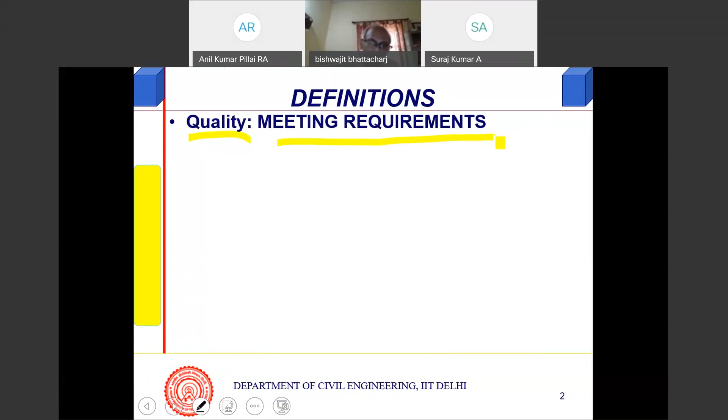So, some definitions to start with. For example, quality - what is quality? Essentially it means meeting requirements. Therefore, quality management means...

Quality management means the means, the way that is devised, for meeting this requirement.

Quality control means to know the status vis-a-vis what you have proposed. Assurance is available to the party, that is the customer. For example, cement industries, Ramco Cement, any cement industry, they do have an assurance program because cement is a factory produced material. The same thing should go to concrete action. I'm not talking of assurance today.

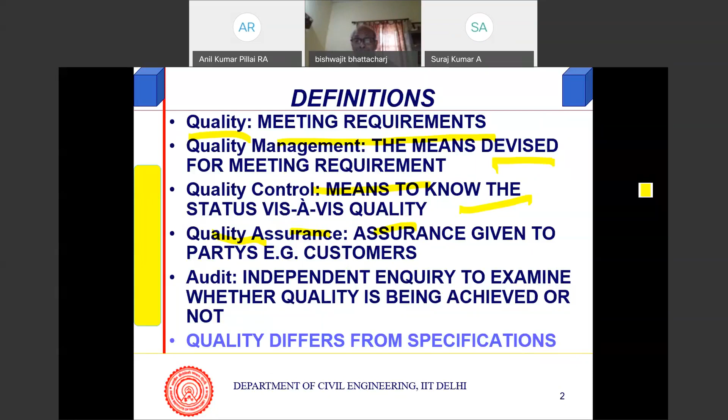So specification could mean a different material altogether. For example, M50 grade concrete and M40 grade concrete - it's not necessary that M50 grade is a better concrete, maybe in some respect like strength especially, but quality is independent of that. Now, what constitutes risk to concrete?

Essentially, it comes from lack of information, understanding of resources, and lack of interest. This may lead to problems from some sources, which I'll talk about, and when it should be addressed - for example, poor details, wrong geometry, wrong specifications.

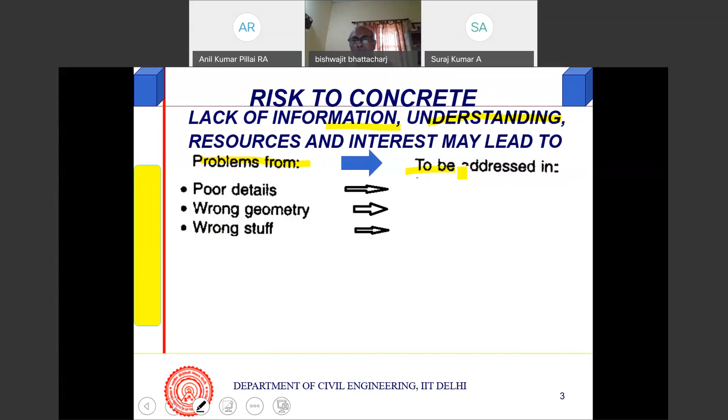These are not part of my discussion today, but this can come from method statements and material checks. So if you address this in method statements and material checks, then issues with raw material, environment, and design shape will not come in.

Now these are related to our site - for example, not vibrated properly, poor cover, wrong cover, weak surface, and joint workmanship not being proper. This is at the site, covered by checklist and also post-pour check. So what is actually important for us is this part today, but I'm not covering everything - only certain things.

One very important thing is measurement. For example, cube strength measurement or anything, any measurement for that matter, slump or whatever it is.

Well, there's an acceptance zone. We'll come to that later on when we talk of not so much of statistics, but a little of it. So we have an acceptable zone, and anything in between complies. When it is at the border, well, it does comply, but in the long run, it may not.

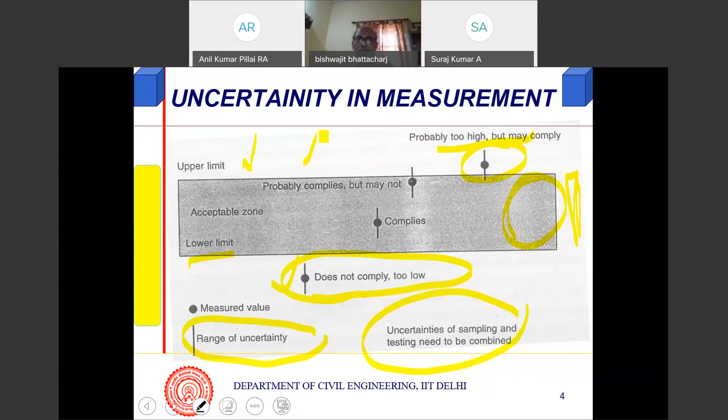So therefore, quality assurance I have defined earlier. Actually, you are assuring your client, because this is recorded under ISO 9000, and so on. There are so many things involved.

So the person comes to you, for example, Ramco does mix proportioning for some organization. So they come to the doorstep of Ramco, the reception. And from there onwards, the flow of information, flow of everything, is recorded. And the customer can verify it at any time, for traceability, what material has gone in, etc., as it comes out.

So that's quality assurance. But quality control is related to production or the production process. So I'm not sure whether Ramco has got ready-mix concrete plants. They may be having. But if you have a ready-mix concrete plant, we have got one ready-mix concrete plant there, and that's where it is more important.

I mean, assurance is also related to cement or concrete, for example. So in a ready-mix concrete plant, somebody comes, wants to buy the concrete, and from there to the end, it has reached the site at the formwork, because RMC finishes there. But if it is further beyond, then the actual structure will be the product, and if the customer is satisfied that everything has gone okay, and the customer can check and find out, that would be assurance of the project.

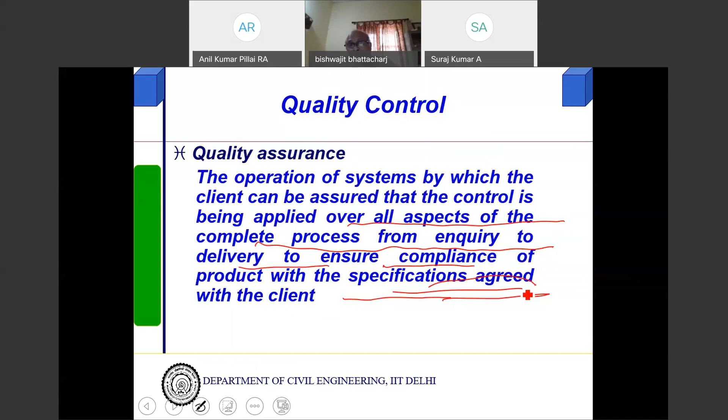The specification agreed with the client should not be better than that, but should not be lower than the lower limit. And here, the client is assured. Quality control is the operation of the procedures to maintain product quality at the selected level.

Quality at the selected level - that's my definition.

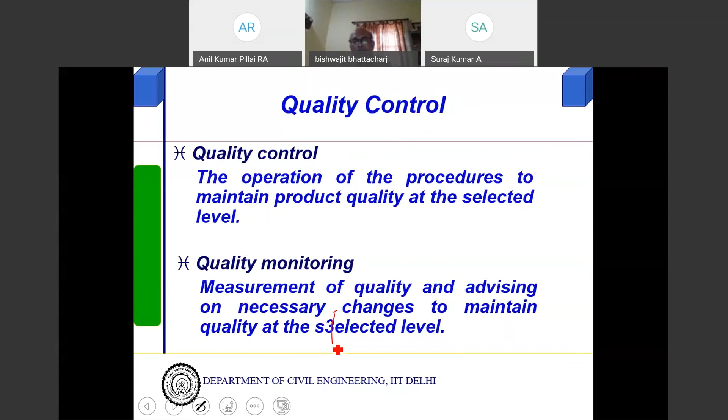Now I was talking about forward control. That involves testing all the materials. Let me concentrate on concrete. So I should be testing all the ingredients - forward control. If the ingredients are not within an acceptable range, then usually there will be further variation in the product, that is concrete, right?

Well defined, much better defined actually for, let's say, cement, which is factory produced. They have online monitoring systems, they would find out, steel or similar things. When it comes to concrete, there's a little bit of difficulty getting in, and I'm not very sure we are doing very good statistical quality control in this country.

Quality you might be giving, but the quality control system adopted is not really the most scientific or the best way, I'd say. So we'll discuss and then find it out. First thing is testing materials - this part many people are doing. Many RMC plants do this; they will not accept cement if it is not up to the mark.

Then storage is important here. How do you store the cement? Even sand in bins, open bins - if they are in Rajasthan in summer, you have dust coming in, they'll simply contaminate them.

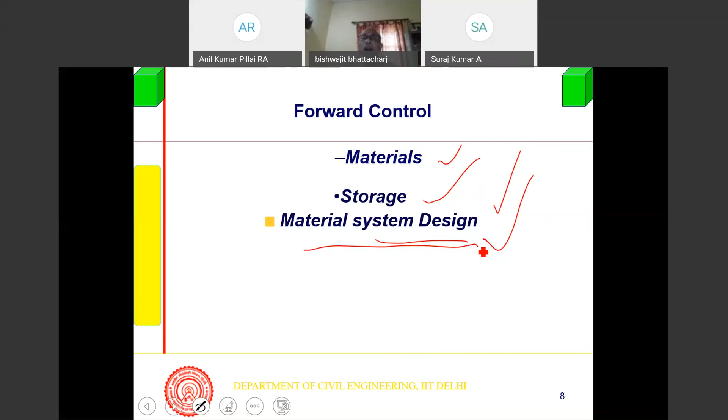Plant maintenance also forms part of forward control - we'll see that a little bit more. Your mixer machine should be mixing the job properly, that is, it doesn't introduce variables. Batching plant calibration, load cells - we'll come to that a little bit more. Part of forward controls: checking your machines, checking your material system, storing them, checking the material design, doing it properly. Maintenance of production machinery - these are very important, this is part of forward control.

So if I have a ready-mix concrete plant, at the gate for entry of materials there should be a testing procedure available where it will test the material and allow it to come in. And when it is in, it should be stored appropriately. And all the batching plant's load cells or weight measuring devices, or dispensers for discharge of water and things like that, should be calibrated from time to time - calibration check.

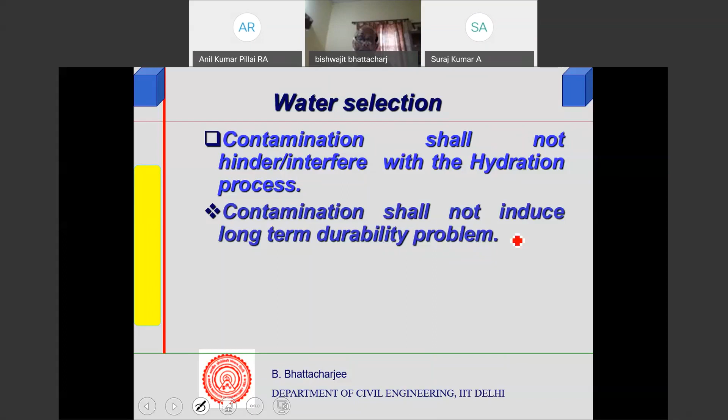That's why we find in northern India, even in Bengal, people have used chloride-ridden water, leading to corrosion within 5 to 7, 10 years of time. In Delhi it's very rampant, affecting setting time.

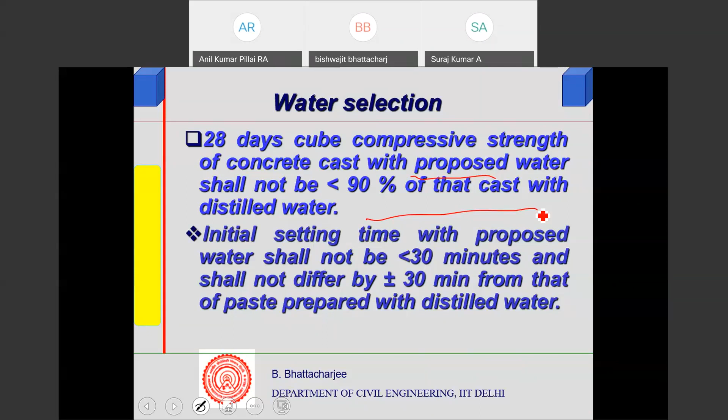Then coming to batching, this is important. This doesn't exist, but varieties of sophisticated measuring are also important, and weight is very important. Gauges. Waters are usually flow meters, but in some cases they might be weight.

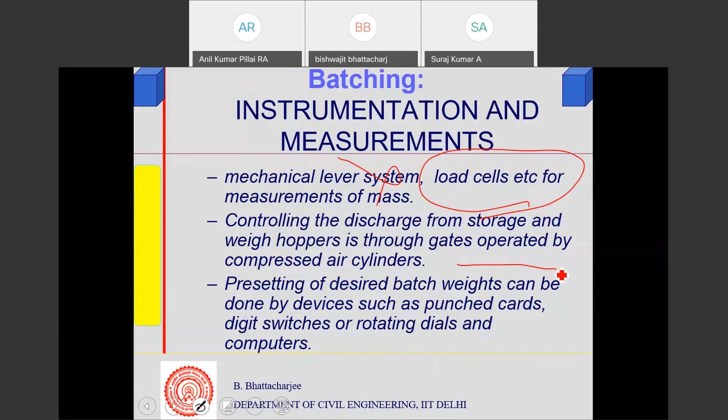This requires calibration. It should be regularly checked with a routine, and some specialist checks for weight. You know, if for example water is W, and you propose cement as C, then W by C gives the ratio. But if you have made an error, it will be W plus or minus delta W divided by C plus or minus delta C, which means the strength will vary more.

In the extreme case you have very high water if it is W plus delta W divided by C minus delta C, beyond tolerances. There are certain tolerances the codes allow you, but only if calibrated properly. So batching plant calibration is

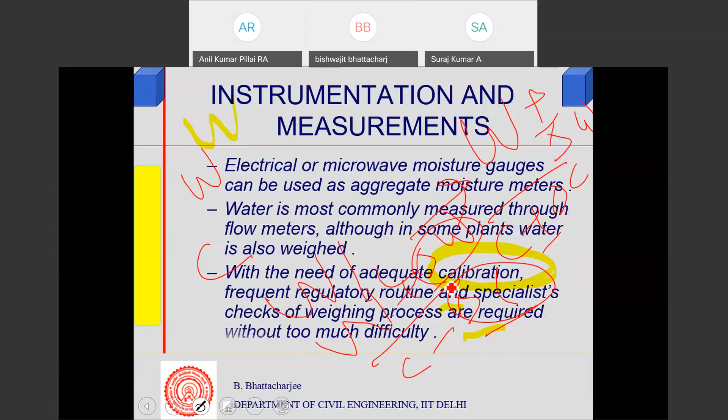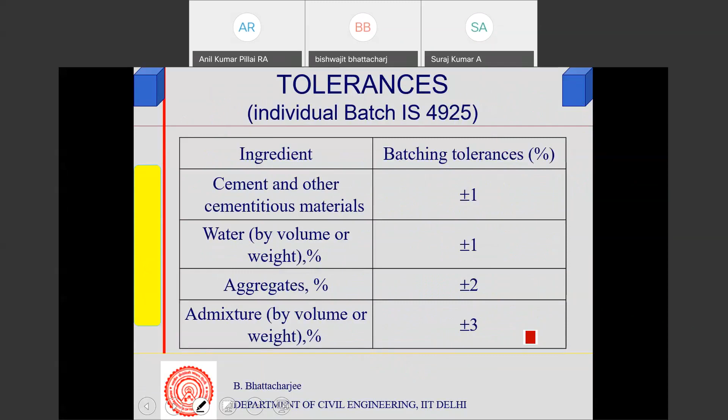very, very important. Batching requires time to time calibration in your mix proportion. The IS code gives you batching guidelines, I won't go into the detail, but you can look into it. Cement and other cementitious materials, by volume or weight, these tolerances are given, so it should be within that tolerance, even with variation. Tolerances apply to a minimum of 30% of the scale capacity divided by weight tolerance, as given in the table.

So it's a guideline. Now, the next important point is mixing. If your concrete is uniform it will still have some variation. Variation depends on proportions, as I said. So if your coarse aggregate, let's say coarse aggregate is C,

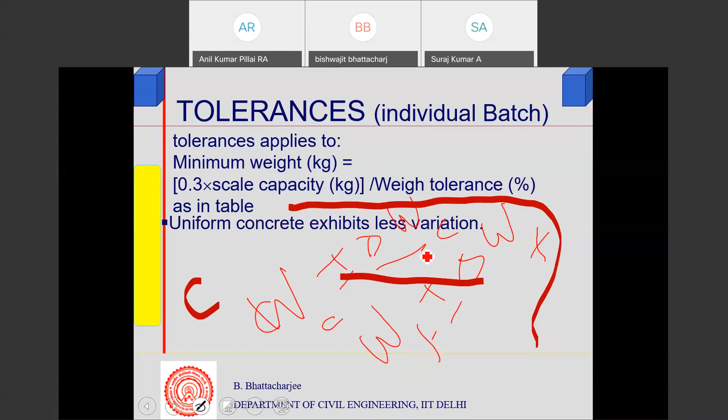You might add more or less, you just don't know. So the mix proportion that you actually designed will have a lot of variation because of the production process. Therefore, quality control should look into these issues, check calibrations regularly, and make it uniform. You need to exhibit less variation, though there will be variation nevertheless.

That's what I'm highlighting all the time. Higher delta C, higher delta W, errors in cement and water measurement will result in higher variation in strength, and in all properties in fact. Quality control in mixing, this I also want to highlight, can introduce non-uniformity.

Suppose you collect fresh concrete samples at different stages and check the properties immediately. Your mixer machine, of course the bottom opening mixer machine used in RMC batching plants. But if it is a rotating drum type mixer, this sort of rotating drum is not used anymore in RMC plants, you won't have that.

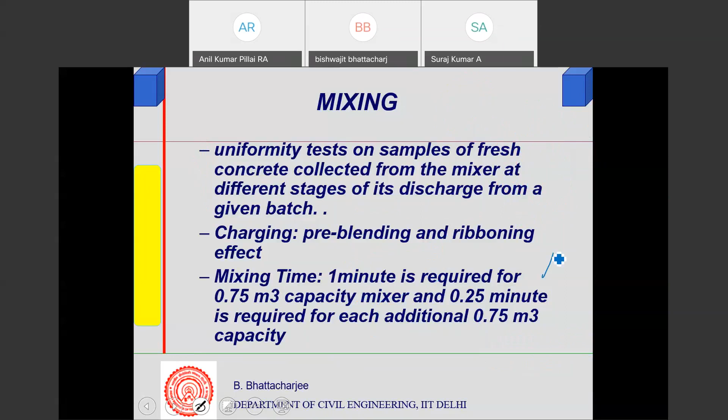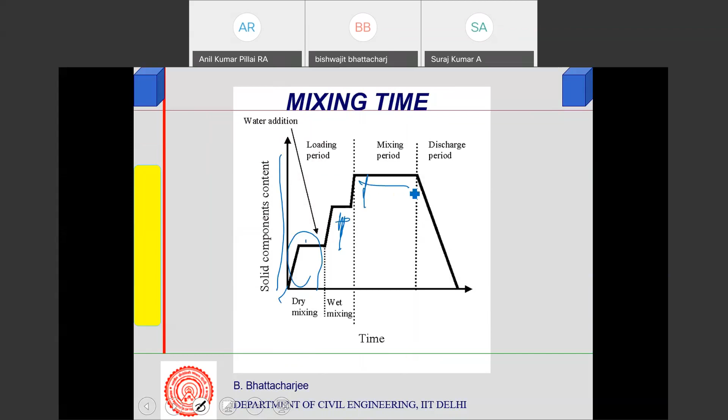Now, certain guidelines give you: 1 minute is required, and 0.25 minute for each additional 0.75 meter cube capacity. Okay, those are guidelines. But my point is, this is the better way: dry mixing first for the solid components content in the mixer, then water is added, followed by wet mixing and final water added, then a mixing period, then a discharge period. That's a good kind of practice.

There must be many revisions beyond this. Batch material, except for the full amount of water, etc. It just specifies that minimum. Okay, that's fine. Mixing time beyond a point may not result in more uniform distribution. Increasing it can improve uniform distribution of hydration and therefore strength, but if you prolong it too much, it cannot increase the strength proportionally.

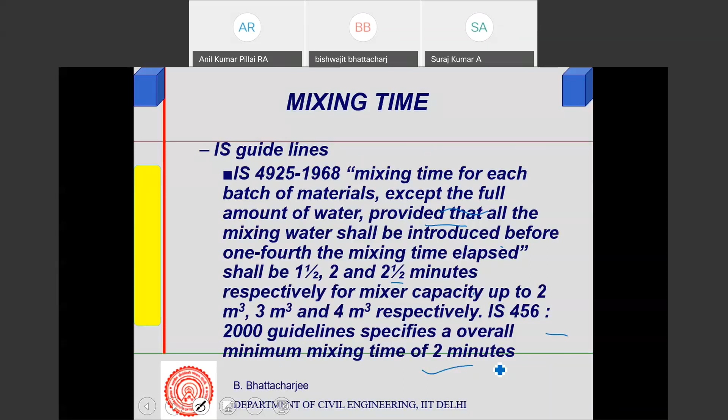It has no benefit. So it's a soft aggregate, there could be any issue that might increase. So this is what people have seen.

So the machine looks at workability of fresh concrete. Density of concrete check - how do we do that? We'll just talk about it. Air content, coarse aggregate content, ratio, and cement content.

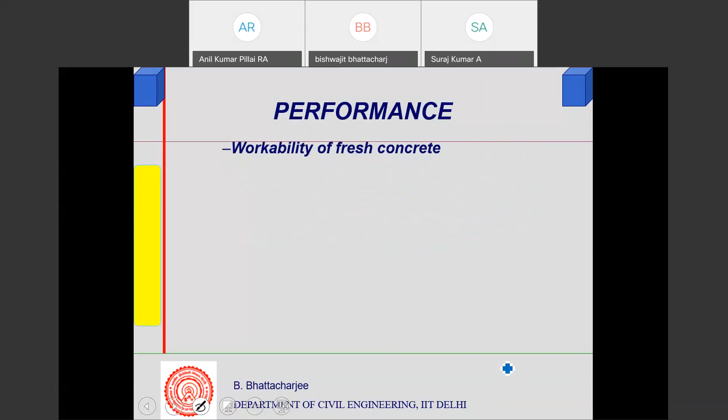Now, 15% of the discharge, first 15%. Machine is discharging samples, measure their workability immediately. Of course, wet measure, air content - compressive strength will require time.

Because analysis of fresh concrete, what is done is it is sieved through a 4.75 mm sieve, whatever is retained, that's the coarse aggregate content. Wet sieving to 2.36, whatever is the solid particle will be cement or powder. So there are ways.

So from first 15% of step find this, and last that is after 85% of discharge, you again find out this. So 85% is discharged, and if the variation is not too large - really what happens is, initially there's a tendency to actually discharge or segregate.

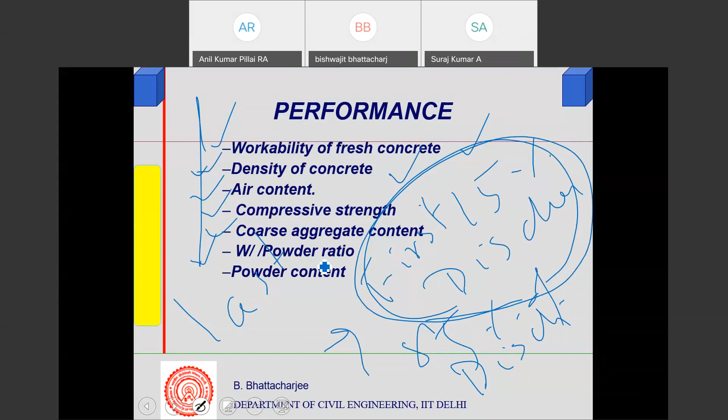What we find is, if you increase the mixing time, strength increases, and variance, which is actually standard deviation related to variation.

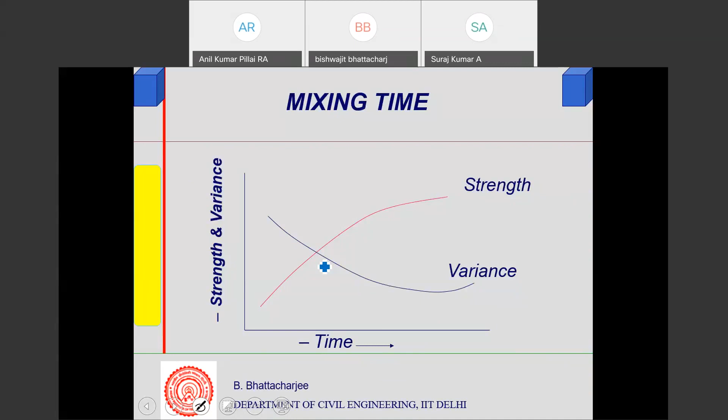So optimal mixing time concepts and doing practical work at a batching plant - that would be very good work actually.

Control - you test material mixing, involve batching, mixing machine, check their performance from time to time. And that's possible, not submission, just replicate.

Ready mixed concrete plant - site mixed concrete cannot be as good quality-wise. Quality control cannot be as good. In fact, many of the developed countries use about 70% of their cement for RMC route. In India, I'm not very sure, it was about 5-6%, more than that.

But it may not have picked up - the action has also picked up to 7%, let's say, mechanized. But otherwise it is still quite a bit non-mechanized, and there these problems can come very regularly, where nobody bothers.

Of aggregate - their immediate control during the production process. This was all forward control, all before production.

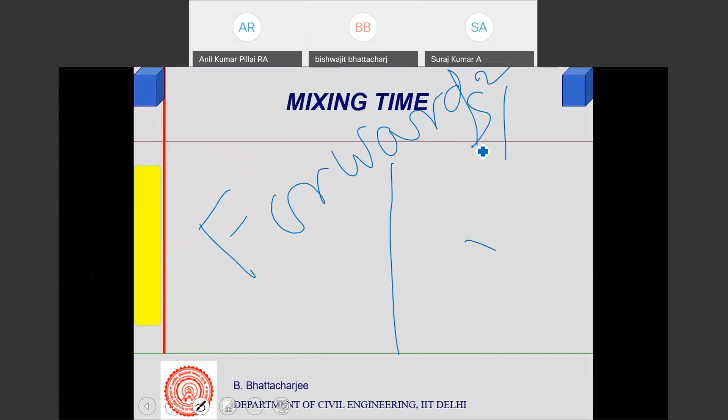Immediate control during production - there's not much, and then adjust the cement plant. Even they get the uniformity.

Your machine is performing - percent of the dispatch, take even from the truck, you can do that. Percent, after it's higher because you get stuck in traffic jam, or number of revolutions are quite - codes say we can't have more than 300 rotations at agitating speed. But in India, of course, it goes beyond.

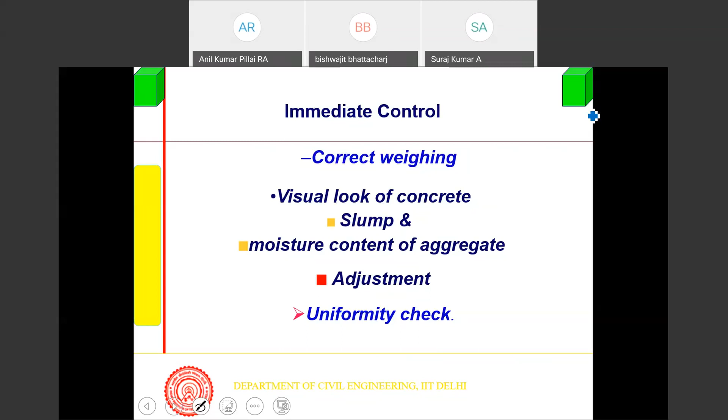But whatever it is, you can take a sample after such agitation, remaining uniform. When in your batching discharge, you can mix and discharge. This is a retrospective monitoring.

It is not known. You go to any code, functioning, you'll find several water cement ratios.

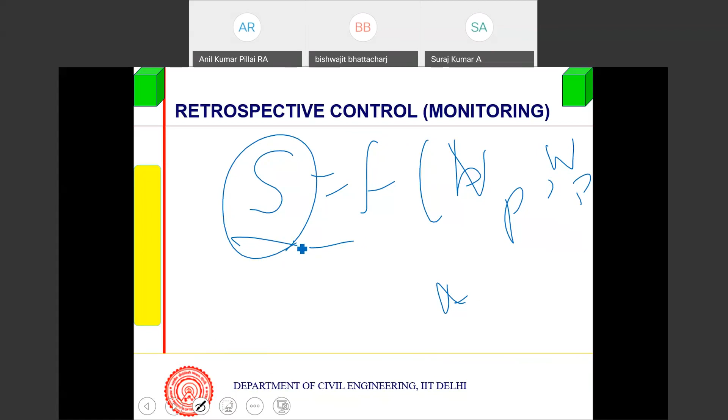Because it's not universal, I can't give an equation. Slump is a function of paste content, volume of paste, and the water content in the paste itself, or the admixture content. But again, I don't have that directly. I already have a property for that matter which I can test immediately - I have to actually do a test. Slump or whatever it is, is generally a setting characteristic. There's no other way to do it. So therefore, proportioning is not mathematical.

Not math. And that's why there are n number of methods. An RMC plant can develop its own method suiting to its needs.

It is again something more than that. What is the problem? This might go on changing. For example, let us say XYZ takes a Ramco mix. After 1 month, because Ramco would have taken a small amount of sample, right? Their own cement, let us say, we are controlling well, but still there will be variation.

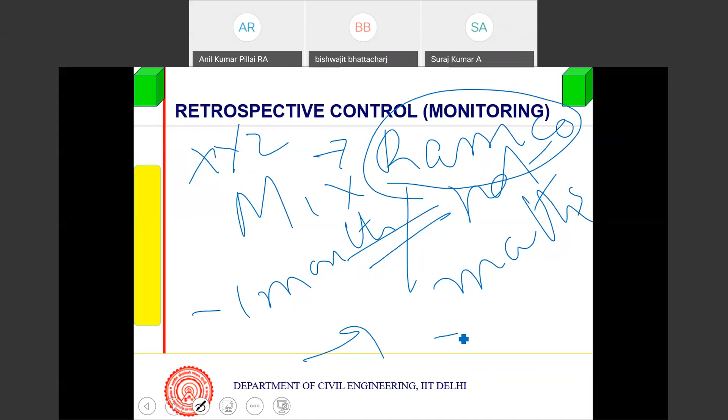Some other aggregate, etc., etc. There are several factors, like the truck and things like that. So this will not be valid. It has to be monitored continuously, monitored continuously. This is not like many other production methods - too many ingredients you are producing, so it has to be monitored. So monitoring is very, very important.

And to my understanding, very few people are doing it in this country in a scientific manner. So you have to have a continuous check, corrective measures, adjustment, and statistical concepts - you find out mean, standard deviation, and you have to have an accelerated method, necessary because you cannot wait for 28 days to test and modify your mix.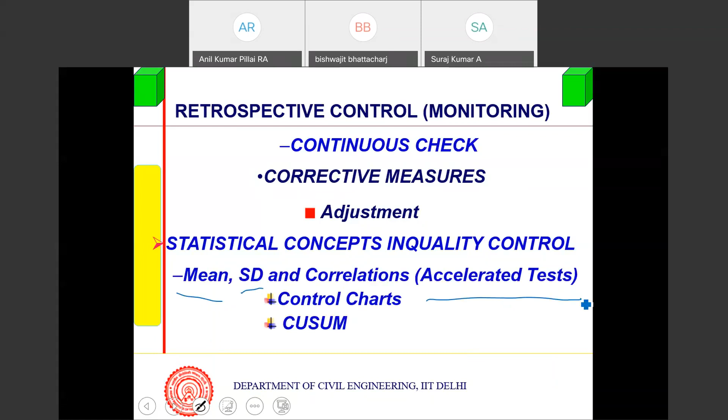Now I'll come to how the quality of concrete is measured. Characteristic features like slump, as I was mentioning, and for the fresh and hardened state of concrete, certain properties you should measure. The most common is 28 day compressive strength to judge the quality of concrete.

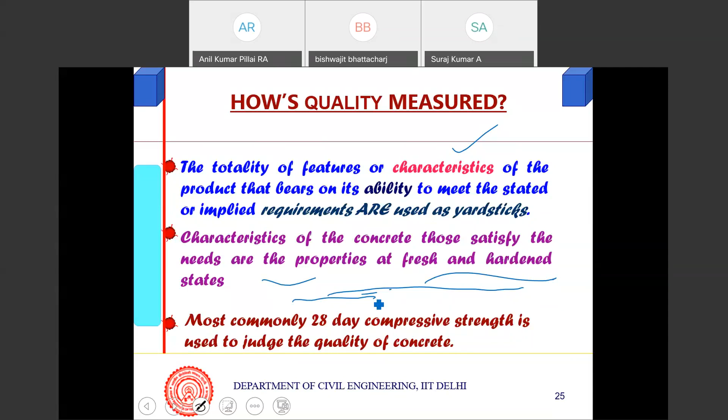Concentrate on that more than anything else. You can't have all the products completely alike. Even if you take a steel wire, let us say you're cutting it by laser or cut it by a chisel - there will be variation. With laser, it cannot be exactly the same.

Say I wanted to get it 100 millimeter, I'll get it 100 plus some fraction with laser cut, and in case of chisel I might get some discount, etc., etc., several things. So no method can be absolutely perfect.

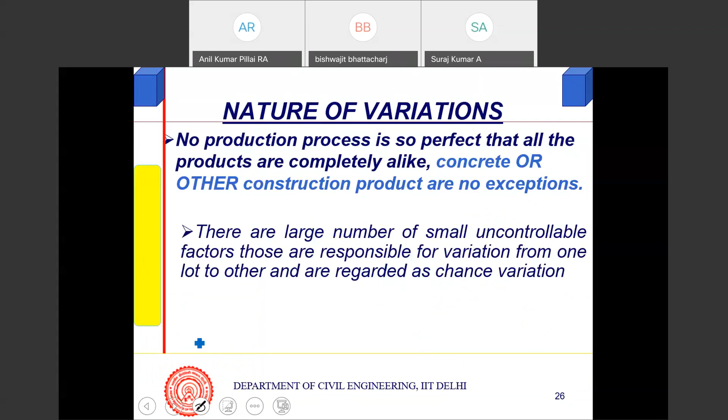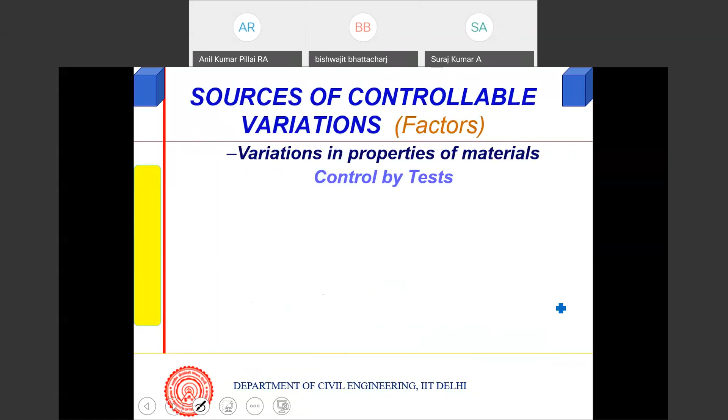We should not add variation to the concrete mix proportion - because more water means less aggregate, but cement quality remains nearly the same, so minimize this. So properties, variation of properties we control by tests, and we said proportion is controlled by forward control. Variation of processes are all forward control. Quality, cube compaction quality, sample compaction quality - many such factors.

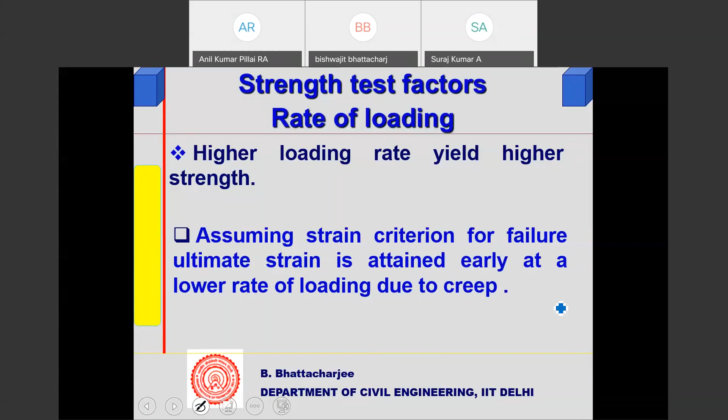Now strength testing is important, which I haven't covered so far. See, as we test strength, the rate of loading is very important, and I find that many test laboratories don't bother about this - that's why I've included it here. So a higher loading rate gives higher strength. Now the IS code has standardized it to 14 MPa per minute.

So rate of loading, or strain rate - as you increase it, the measured static strength or strength increases. So basically this is about rate of loading. This is from an old book - so in pound per second, you find that strength increases because crack propagation relates to strength and time. So these are the issues.

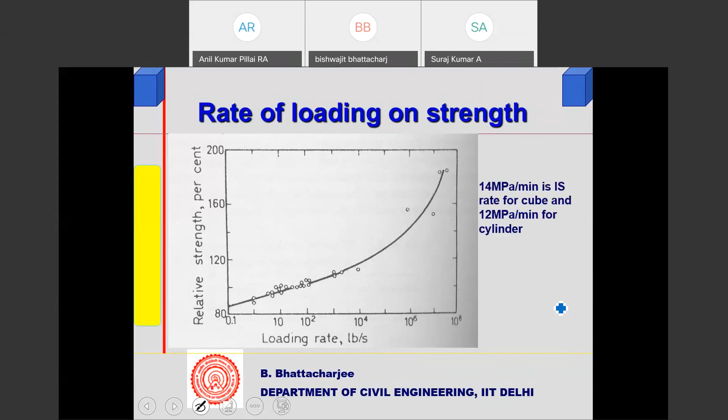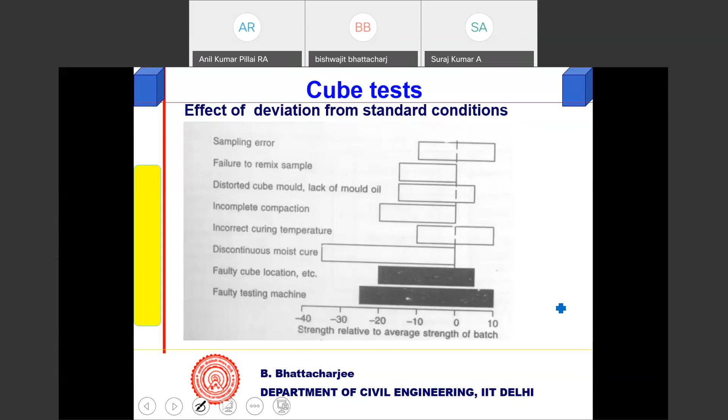Then moisture condition - it should be as suggested in the code. Now, there can be variation due to sampling error. First of all, you make a sample - some failure to remix the sample. They can add - left hand side is minus, they reduce the strength; right hand side is sampling error, both plus and minus. Faulty testing. So there are several things - machines used in testing can simply introduce variation. It can have lateral distortion, which can create problems. I won't go into that too much.

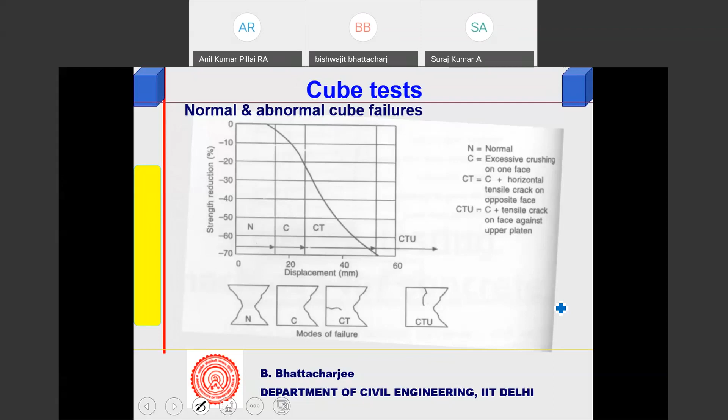Displacement versus strength curves shown, and so on. The horizontal crack coming, that is tension, right? There's a tension along this direction, meaning there's been a kind of bending, and so on. Concave surfaces and convex surfaces.

If your mold is not proper, then sampling is 3 specimens in a sample.

I don't think I'll go because I think time is also a factor. You'll get bored if I talk too much.

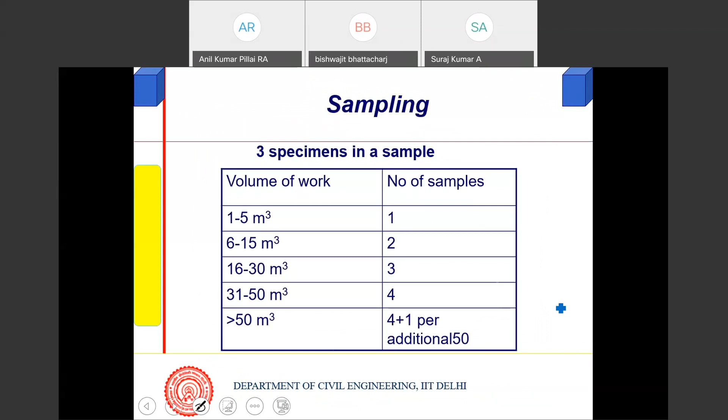Now there's a reason actually. This is what is called, why there are too many factors affecting the random variable. Here, random variable is compressive strength, measured compressive strength.

And when this is how it... So when there are many factors, as I said, fraction variation can vary in this way. And this can be actually normalized.

Such that the area under the curve is 100%. If you divide by total number of samples, each will be a fraction, and sum of this fraction will be equal to 1. You can approximate this into a kind of curve, and average represents mean, standard deviation is a spread.

If you have some question, I'll answer there. And your characteristic lies here. Your 5% sample will be failing, and 95% sample will be... passing.

Just a minute. Key. Yes, please.

Okay, so that's FCK plus 1.65 sigma, we know, is the mean. So anyway, this is known to you maybe. But if I test more number of samples, then I get this sort of curve. I think I'm running out of time, so I'll have to see how I do.

So sampling, distribution of mean, because this is relevant to acceptance criteria. I don't think I'll go into this now.

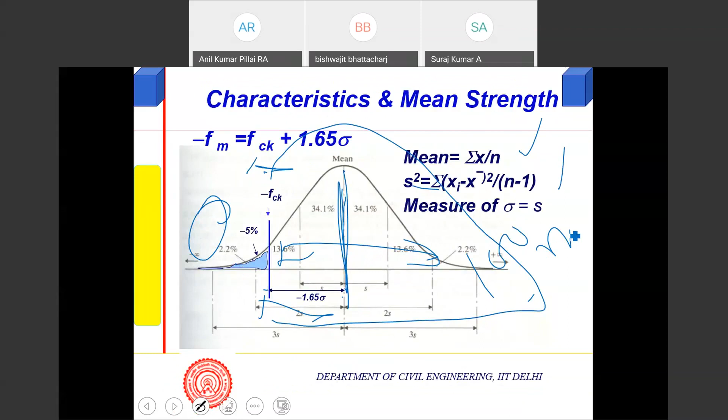But if I try to take samples out from this, take some random samples, let's say n number of such samples, and then find their mean. Now I can take a sample from here, another sample from there, another sample from there, I have taken 4 of them. So their mean will be somewhere there.

Let's use another color, 10 of them, 1, 2, 3. The chance of getting something there is also 10 of them. I might find the mean closer to this.

So if I take some samples from this, 10 cubes, and find out the mean of the means, the mean of these 10 samples will be closer to... if infinite number of samples, find out the mean, and this repeats several times, it will be the mean of those means that comes out. Am I clear? Let me make it clear again, because this is an important statistical issue. I'm taking random samples from here, n numbers, finding out their mean. This I repeat several times, so I'll have m means.

This mean lets me plot a histogram. This is called the histogram of sampling means. Now, if the sample size n is large, if it's infinite, then I get all the data. If n equals 1, it will coincide with this. So this distribution of sampling means is the distribution of the mean of n samples. That's what we call the distribution of sampling.

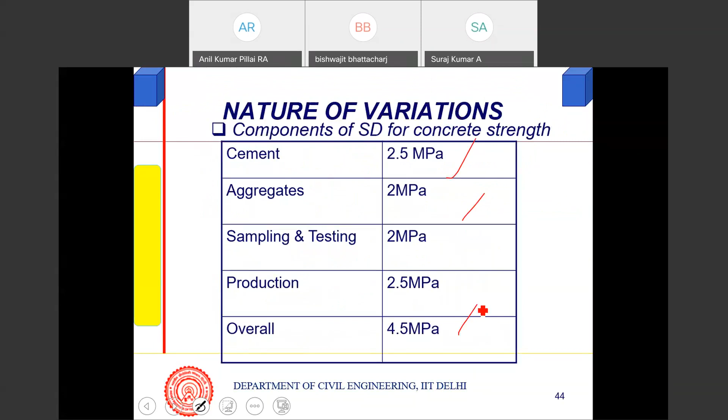Now what will be the upper control limit? Perhaps I have an equation. If I don't have it, I'll just give it. Yes, it's there. Target mean strength is 50 MPa, and there are variations in this.

An upper control limit would be the target mean strength plus 3 times the target standard deviation, because that's the variation we have seen, 3 times standard deviation. And the lower control limit will be the target mean minus 3 times standard deviation.

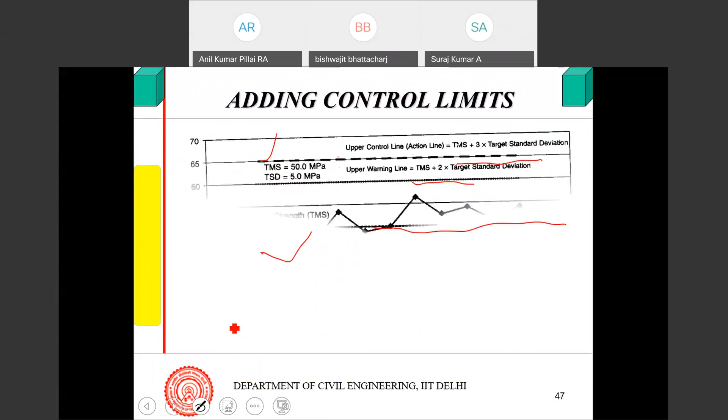So this is the upper control limit, target mean plus 3 times the target standard deviation. But the warning line is different, because going beyond it is uneconomic. You should not go there. The lower warning line is at 2 times the target standard deviation from the lower control limit. So if it is below this, it's not actually acceptable. It's not the same concrete, something is wrong. This is how we monitor it.

That's called a chart for strength monitoring, based on date of casting. And this you better do through an accelerator.

Well, there's also a simpler way of doing this, called the CUSUM method. You take the data and define the range. What is the range? I'll come back to this. Maybe there's something more to charts.

Charts are there, just let me go back to this, and I'll come back again. Yeah, this is what I am doing. Accelerated testing is important; this is from a British code, of that kind. It should be currently BS EN, and it's right to do an accelerated cube strength test.

Now, for normal 28-day strength or 7-day strength, you have to develop your own correlation. So this could be, not 2 days, maybe within 3 days, you get this result.

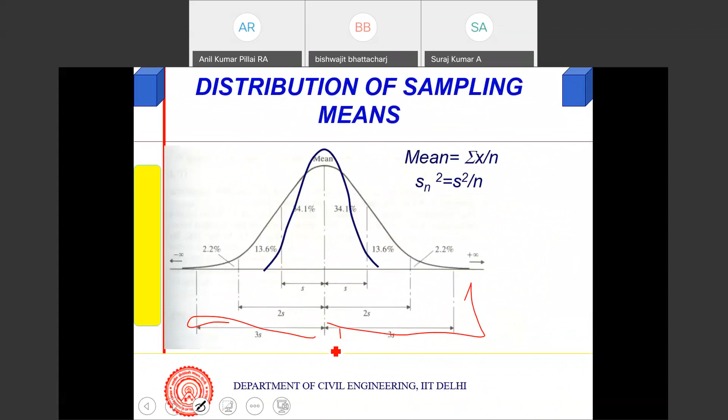Because for maximum values, for example in this case, this is the maximum value, this is the minimum value. So the range is this, but for 2 data points, the range is simply the difference between these two. So range is defined in this manner, and range can be related to both mean and standard deviation.

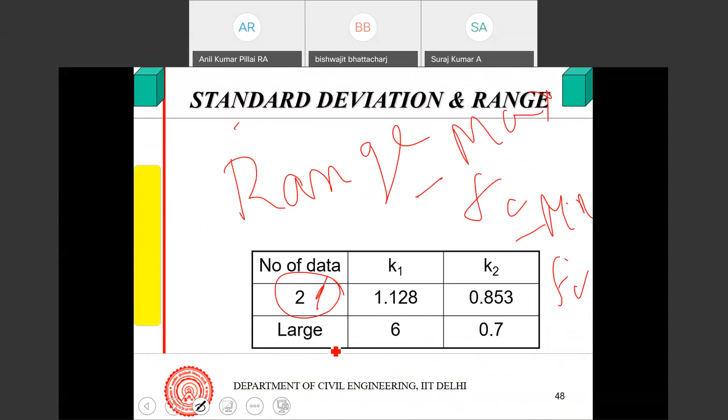For example, the mean range is equal to K1 times the standard deviation, and the standard deviation of the range is also related, but I'm not interested in that at the moment. So if I find the range from 2 data points, divided by 1.128, I can estimate the standard deviation from there. Range divided by 1.128 will give me the standard deviation. This is an estimate.

Okay, so that's fine, because if I have 6 data points, a large number of data, then we have seen that 3 standard deviations plus and minus 3 standard deviations, so 6 standard deviations, equals the range. Let me go back to this again. I said that was 6 standard deviations, 3 this side, 3 that side. So for large data, it is 6. For 2 data points, that's how it is. We'll come back to this.

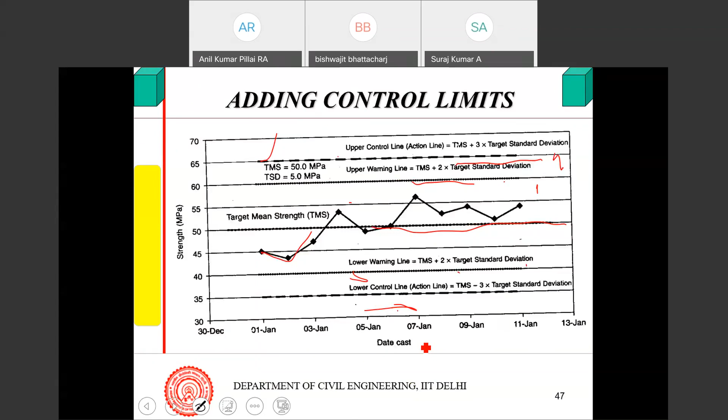So that's what it is. For each standard deviation, which I have decided earlier from my past data, the target mean range will be this, so that I can follow this range and see whether it is what I wanted. For example, if I had a standard deviation of 5, I would expect the range to be 5.64.

So from previous day's data and today's data, I can make a Shewhart chart for range also. That means I can monitor my standard deviation as well. What is my target range? It will be 1.128 into standard deviation. So its variation we can monitor, and we can monitor both mean as well as standard deviation using this chart, day-wise.

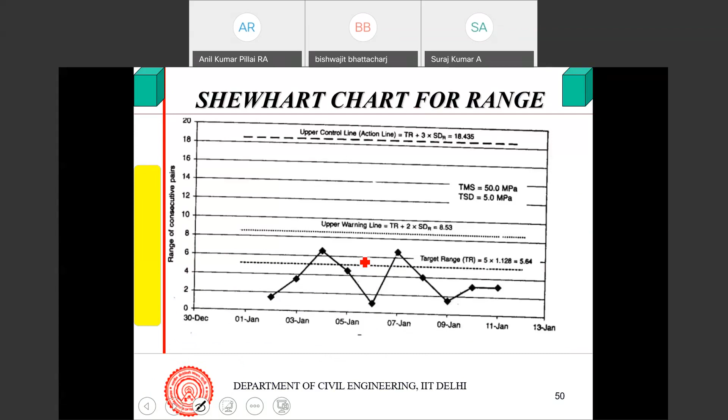But the charts have some limitations. The 28-day strength could be predicted strength, as I said, through an accelerated test, so that I can take action and verify this later on.

The limitation is these only tell me whether I am within the range or not. If going beyond the range for some days, I can't tell whether it's a trend or just random variation.

So there's something called the CUSUM method, the cumulative sum method, and many codes have this. BSEN does have this kind of quality control system, both for mean as well as standard deviation.

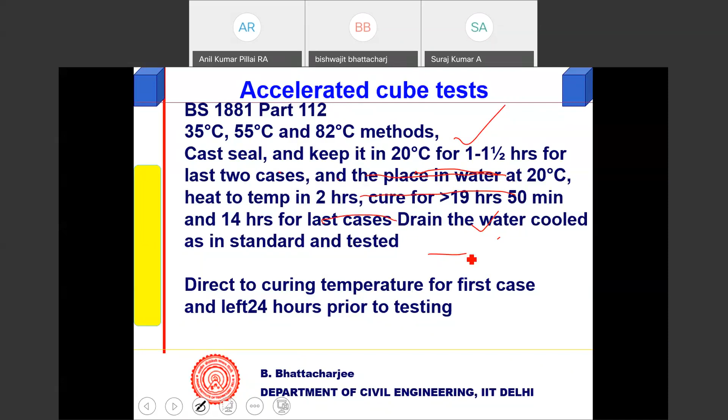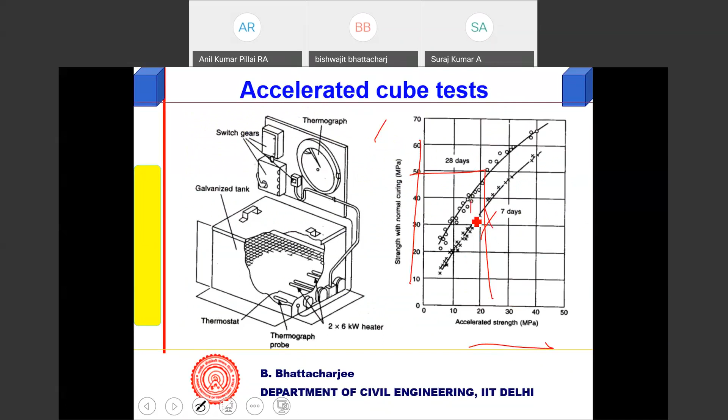So you can do the accelerated test, then you get the answer pretty fast. Then you can verify this correlation later on. If it is changing, then you have to recalculate your data. But this is all possible.

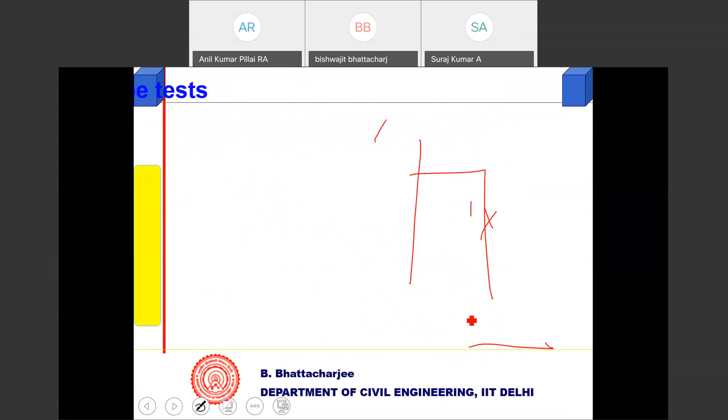It should actually be swinging between 0, plus minus something. If it goes like this around 0, your things are under control. If it goes like this, and then comes back, and then goes again, it's still under your control. But when it continuously goes down, there's something wrong, you're not giving good strength. If it continuously goes up, your system is over-designed.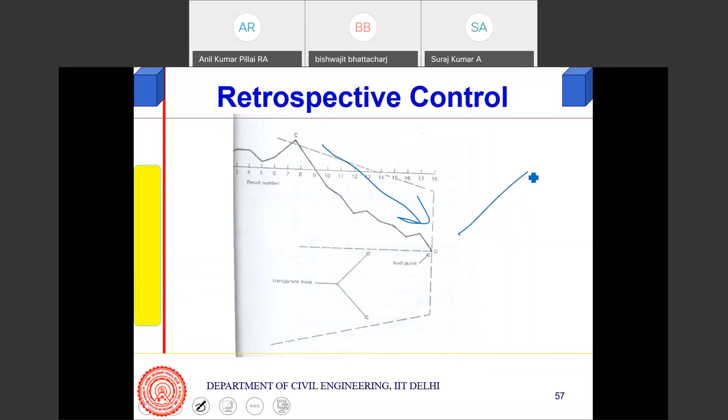So this cusum technique can be used to identify whether things are going bad as you are designing. Once you find it has gone out of the mask, you redesign, you change the mix proportion. This is to be done at the site, not at a laboratory, which is normally what most contractors do.

Because the government organization insists the mix proportioning should be done at IITs. Some private bodies might take it from Ramco, but PWD will insist it should be done at IITs. I think it's a bad practice. Even if it is done at Ramco, it cannot be eternal. It has to be checked from time to time because there are so many variable factors.

Once you find that something has gone wrong, you monitor and restart it again, then check it again. This can be done for every result you check. It's a very easy job, a program for this. One can do the program. This will ensure you are not wasting your cement, being sustainable, not wasting cement, and not failing if you are selling ready-mix concrete. So cusum can similarly be done.

So the range, the difference between these two, is 6, and my target range for 4.5 as a standard is to find out. You can plot exactly the same thing. So is your standard deviation going away? That you can find. But here the mask is somewhat different - that's 8.5 sigma by 10. There's a basis for this.

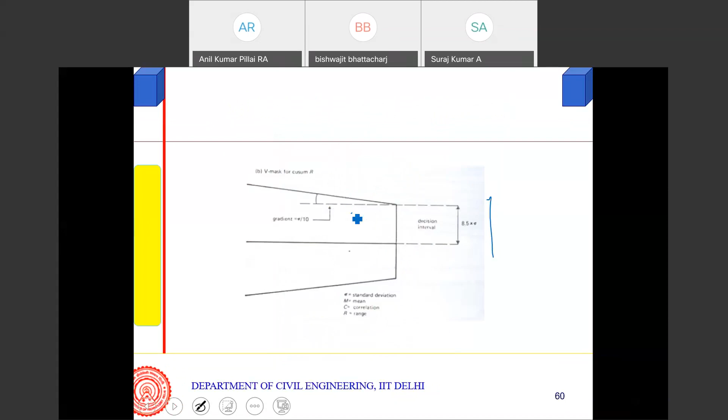So mathematical formulation, if somebody has a question, I can answer this. Write an algorithm for this: proportion you have to change, check the correlation, if the correlation is off while monitoring, re-establish the correlation, change your results, change the mix, so many things. It can be done continuously, it's not a big deal.

So actually, how much strength increase is there, because I'll just see, because from here I know how many results are there. How many results? That many results, right? That many results are there.

Okay, and 8.1 plus sigma by 6 into this length, so this divided by the total number of results will give me the strength reduction that is happening. Strength reduction that's happening.

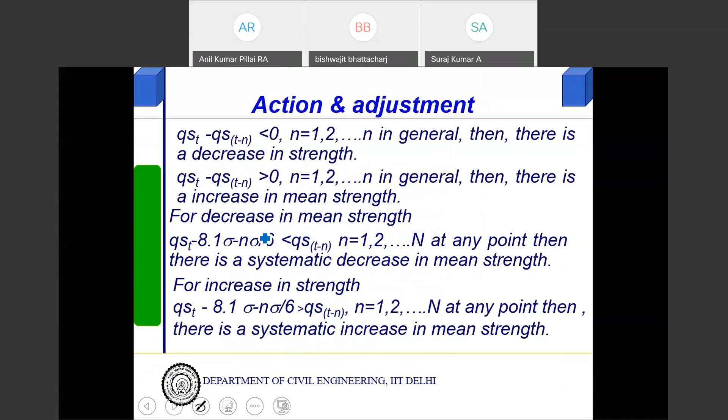Sorry for the interruption. Okay, so that's how we can actually find out and redesign the mix. If you have some questions, I'll definitely answer.

N is called run length, that is this, this is called run length. This is available in the British code and many other codes. This is called run length, N. 8.1 sigma plus sigma by 6 into N, divided by N, is the strength change per day.

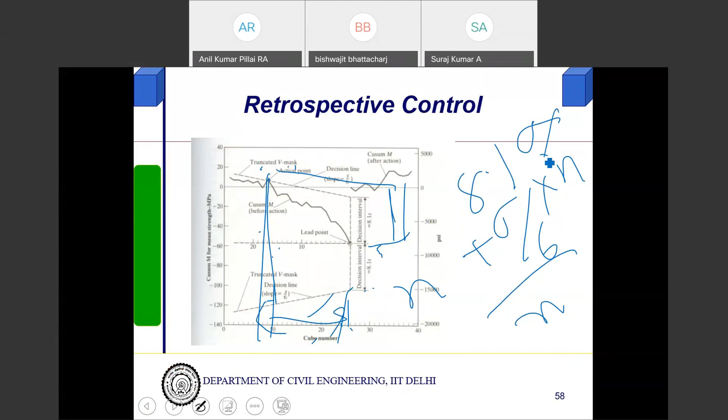There's the formula, there's the formula. I think yeah, that's the formula. That's the strength change, and this is the strength for mean, and this for standard deviation.

So you have to redesign every time. And to do that, any mix design procedure you can use - I've just taken an example of the DOE curve. The curve has actually changed because you are finding that delta Fm actually should have been, but now it has become Fm minus delta.

Your water cement ratio is this, and for this Fm minus delta Fm, that's the curve you can go by. For your Fm value, you have to change the water cement ratio, so this is your curve. Now your Fm is somewhere there, you have to use a lower water cement ratio. You are getting 30 strength, let us say, for the given water cement ratio - this 30 is Fm minus delta Fm.

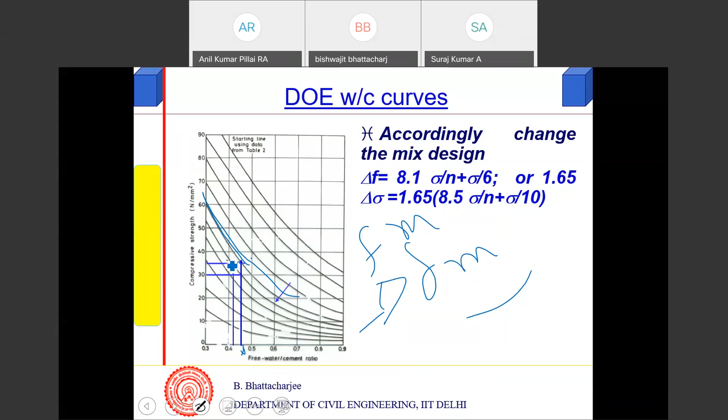So actually this is your curve. For your Fm value which is somewhere there, 33 or something, you have to reduce the water cement ratio and re-proportion the mix. That's how it is to be done.

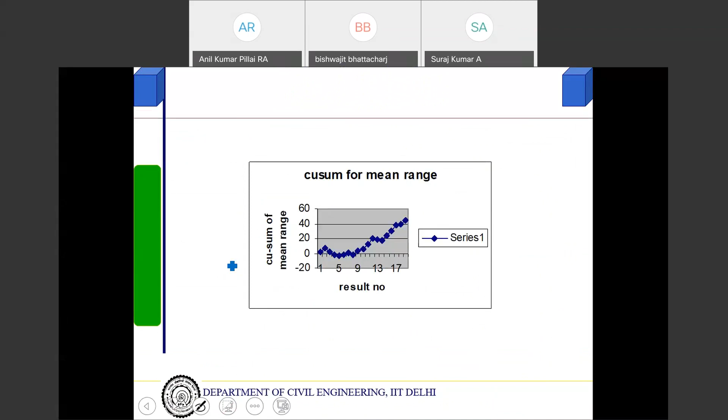I don't think I'll go into this equation. This is what I developed, a correlation available in the British standard. We did this for some case, that's how we took it in Delhi. For the mean, we found that it was actually over-designed. This was some plot for mean, in some other case it's over-designed, and it is continuously going up, they are not bothered. This was some time back, 2004. This is available in a paper.

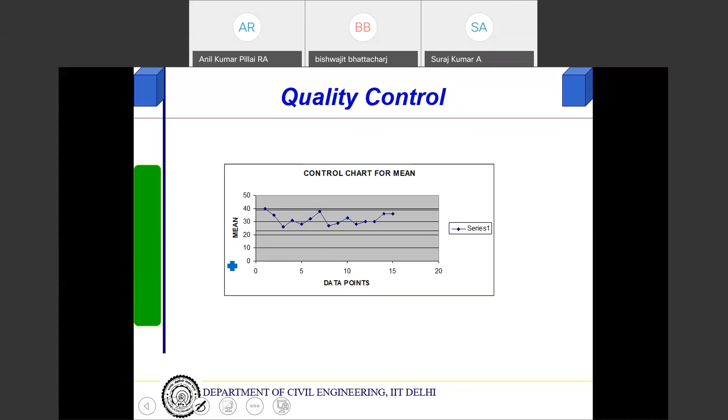Control chart for mean - we were plotting this too, but all the time it was above the target mean. So we have defined objectively what is quality.

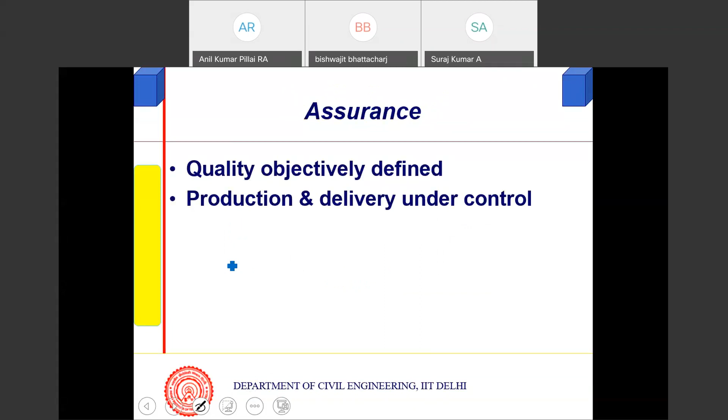We talked about the production, testing, and the whole process. Now if you look at acceptance, it says mean of group of 4 non-overlapping consecutive samples. That statement means it's random - time to random, you can't choose it yourself. Non-overlapping means you have not used it before. Consecutive samples for 4 samples, so mean of 4 samples.

Should be maximum of FCK plus 0.825 or FCK plus 3 for all grades. Now what is this? You see, FCK plus 1.65 sigma is the target mean - let me just clean it up. This is the target mean.

Now if you have taken 4 samples, this can have a variation, and the minimum it will have is 1.65 sigma by under root 4, because 4 samples and you are finding their mean. So this is sigma by 2. They have deliberately taken 4. Otherwise, this will be your mean as you are obtaining.

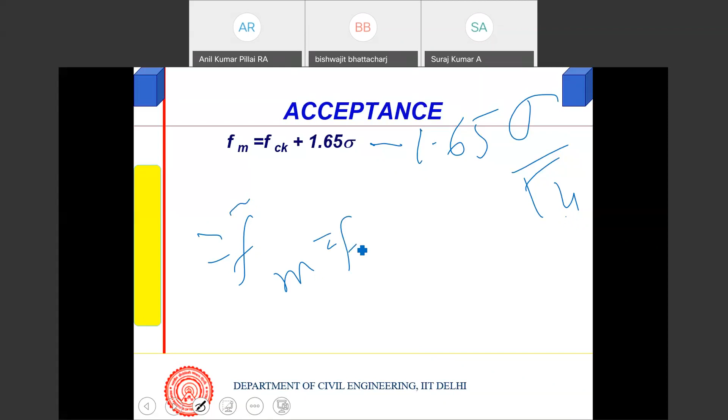Minimum mean you should get - the mean that you are getting should be greater than FCK plus 1.65 sigma by 2, and here sigma, so 1.65 by 2 sigma, which is FCK plus 0.825 sigma. It comes like this. For all grades, they are put in this manner.

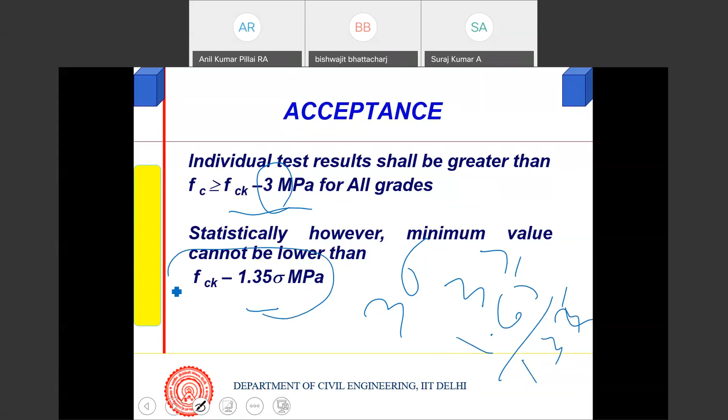Characteristic curve, OC curve for ready mixed concrete, because 5% is the acceptance by the client. But there's a probability that it will be less than 5%, although you have actually given 5%, because 5% probability is still there. And there's something called the operation characteristic curve, which should ideally be - if the defective is more than 5%, it should be rejected. So probability of rejection would be 100%.

And if the defective is less than 5%, it should be 100% accepted. If it is more than 5%, it should be rejected - 100% rejection. But actually it is found something like this. Let me repeat it: if the defective is less than 5%, it should be 100% accepted. If defective is more than 5%, it should be 100% rejected. That should be the ideal condition.

But it can so happen that you have actually produced less than 5% defective, but still there's a probability of rejection - this is the probability of rejection. This is the probability of acceptance, below this is the probability of acceptance. Because the actual operating curve is something like this, and this also comes from statistics.

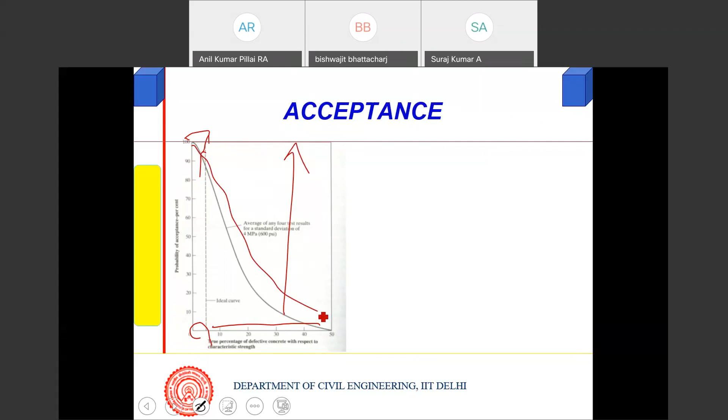This is called hypergeometric distribution - I'm not going into it. So some ready-mix concrete plants will try to make it FM plus FCK plus 2 sigma to reduce down what is called producer's risk. This part is called consumer's risk - even though it is bad, you have still accepted it, even though you have a 70% chance of it being defective.

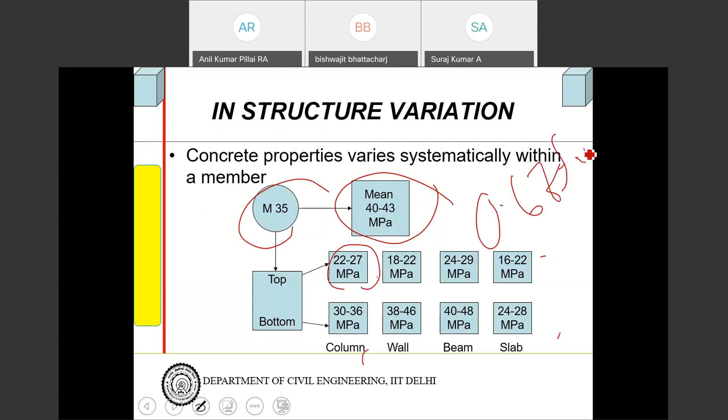In structure, of course, strength varies. If you have M35 grade of concrete, mean strength will be something like this in the cube test. But at the top of a structure column, you will find this actually if you do core test - in slab, beam. Don't worry, this is taken care of in design by a multiplying factor of 0.67. So nothing to worry about it.